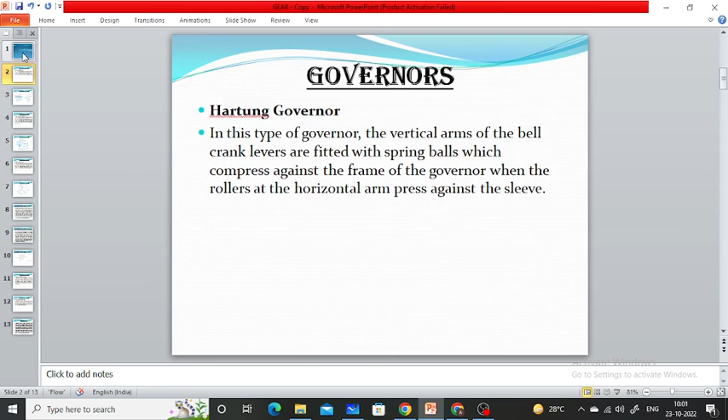नेक्स्ट टाइप का स्प्रिंग कंट्रोल गवर्नर है हमारा हार्टंग गवर्नर। हार्टंग गवर्नर इज ए स्प्रिंग कंट्रोल्ड गवर्नर। In this type of governor, the vertical arms of the bell crank levers are fitted with spring balls which compress against the frame of the governor. When the rollers of the horizontal arm press against the sleeve, in that case, sleeve goes in downward direction.

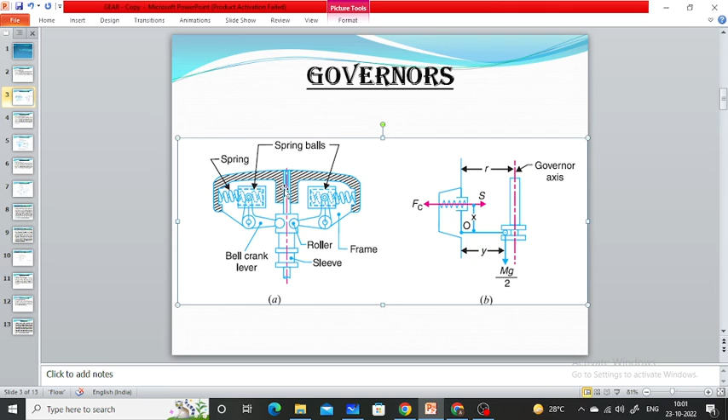इस डायग्राम में आप समझ सकते हैं यहाँ पर हार्टंग गवर्नर का एक लेआउट है। इस गवर्नर में ये सेंटर लाइन जो है ये हो गया आपका स्पिंडल एक्सिस, स्पिंडल। ये स्लीव है आपका और स्लीव में रोलर अटैच्ड है। यहाँ बेल क्रैंक लीवर के वर्टिकल आर्म्स में स्प्रिंग हॉरिजॉन्टली अटैच्ड है और ये फ्रेम के साथ फिटेड है, कंप्रेस्ड फॉर्म में।

जब भी आपका ये गवर्नर का स्पिंडल रोटेट होगा, इस रोटेशन की वजह से बॉल्स बाहर की तरफ मूव करेंगे और जो बेल क्रैंक लीवर का हॉरिजॉन्टल आर्म है वो अपवर्ड डायरेक्शन में स्लीव को एक पॉइंट पर होल्ड करेगा इक्विलिब्रियम कंडीशन में।

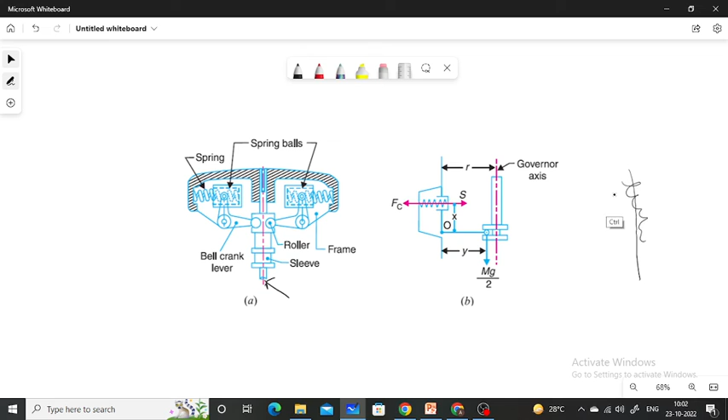ओके, तो हमने देखा था हार्टनेल गवर्नर में जो कंप्रेस स्प्रिंग रहता है, वो फ्रेम से अटैच होके जो बेल क्रैंक लीवर्स होते हैं हमारे, और स्लीव को डायरेक्टली फोर्स करता है। वहाँ पर फ्लाई बॉल्स होते हैं, बट यहाँ पर जो स्प्रिंग्स हैं वो हॉरिजॉन्टल हैं और बेल क्रैंक लीवर को जो फ्रेम है उसके साथ अटैच है, वो स्प्रिंग कंप्रेस कर रहा है उसके वर्टिकल आर्म्स को यहाँ पर। ओके।

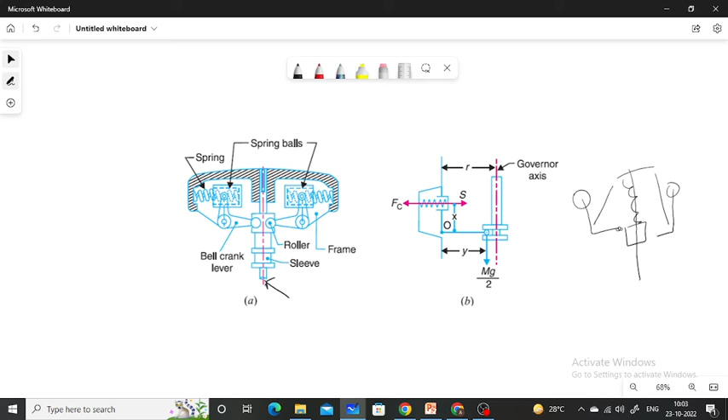नेक्स्ट टाइप का स्प्रिंग कंट्रोल गवर्नर है विल्सन हार्टनेल गवर्नर। A Wilson Hartnell governor is a governor in which the balls are connected by a spring in tension. यहाँ पर आप देख सकते हैं डायग्राम में बेल क्रैंक लीवर एक फ्रेम के साथ पिवटेड है। यहाँ पर वर्टिकल आर्म्स के बॉल्स को सेंटर पॉइंट पर स्प्रिंग के साथ कंट्रोल अटैच कर दिया गया है। ओके।

Balls are connected by a spring in tension. An auxiliary spring is attached to the sleeve mechanism through a lever by means of which the equilibrium speed for a given radius may be adjusted. The main spring may be considered of two equal parts, each belonging to both the balls.

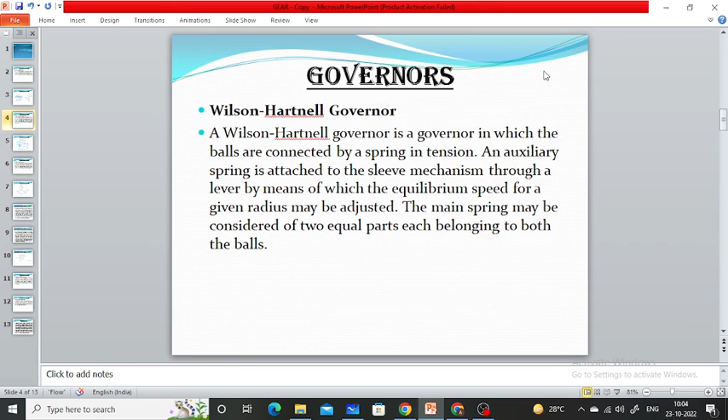तो इस विल्सन हार्टनेल गवर्नर के डायग्राम की हम बात करें, यहाँ पर बेल क्रैंक लीवर में जो फ्लाई बॉल्स हैं उनको स्प्रिंग के थ्रू कनेक्ट किया जाता है और स्पिंडल में स्लीव अटैच है, हॉरिजॉन्टल आर्म स्लीव के साथ अटैच रहते हैं। यहाँ पर एक ऑक्सिलरी स्प्रिंग होती है जो एक लीवर के साथ कनेक्टेड होती है स्लीव के मूवमेंट को होल्ड करने के लिए। जब स्पीड इंक्रीज होती है तो बॉल्स का सेंट्रीफ्यूगल फोर्स इंक्रीज हो जाता है और वर्टिकल आर्म्स आउटसाइड डायरेक्शन में मूव करते हैं, जिसकी वजह से बेल क्रैंक लीवर के हॉरिजॉन्टल आर्म्स अपवर्ड डायरेक्शन में मूव करेंगे और स्लीव का मूवमेंट अपवर्ड डायरेक्शन में होगा।

Whenever the speed of the governor is decreased, in that case the motion of the sleeve will be in downward direction.

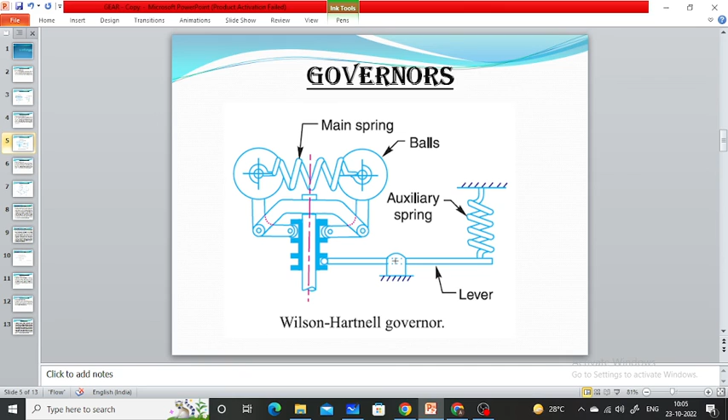Now, the next type of spring control governor is Pickering governor. A Pickering governor is mostly used for driving gramophone. It consists of three straight leaf springs arranged at equal angular intervals around the spindle. Each spring carries a weight at the center. The weight moves outwards and the spring bends as they rotate about the spindle axis with increasing speed.

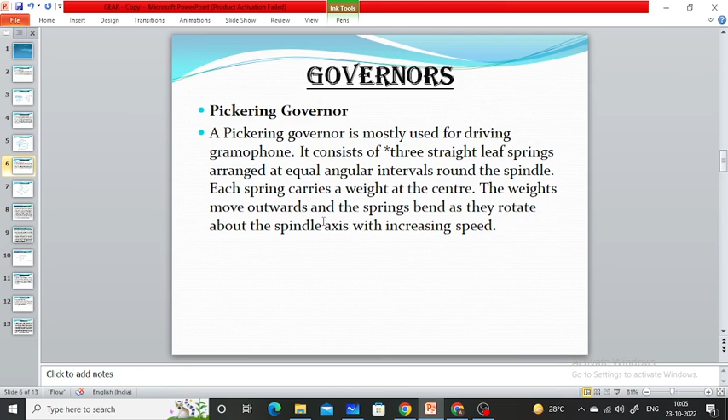तो यहाँ पर पिकरिंग गवर्नर में थ्री आर्म्स होते हैं, थ्री लीफ स्प्रिंग्स होते हैं जिसमें मासेस अटैच होते हैं और स्पिंडल में अटैच होते हैं। जब भी स्पीड इंक्रीज होती है सेंट्रीफ्यूगल फोर्स इंक्रीज होगा और ये लीफ स्प्रिंग्स बैंड हो जाते हैं जिसकी वजह से स्लीव डाउनवर्ड और अपवर्ड डायरेक्शन में मूवमेंट करते हैं।

ओके, तो ये कुछ टाइप के गवर्नर्स थे स्प्रिंग कंट्रोल गवर्नर - हार्टनल गवर्नर, हार्टंग गवर्नर, विल्सन हार्टनल गवर्नर एंड पिकरिंग गवर्नर।

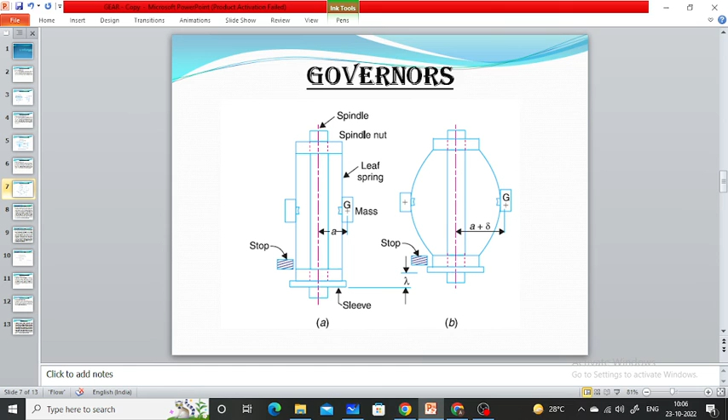Now come to the next topic, sensitiveness of governors. Sensitivity or sensitiveness of the governor. What is the meaning of the sensitivity of a governor?

Consider two governors A and B running at the same speed. When this speed increases or decreases by a certain amount, the lift of the sleeve of governor A is greater than the lift of the sleeve of governor B. It is then said that governor A is more sensitive than governor B.

What is the sensitivity of the governor? Sensitivity of the governor is the measure by which we can say that the output or the movement of the sleeve, by changing the load or the speed of the engine or the governor, is more than the other, or the same as another governor.

In general, the greater the lift of the sleeve corresponding to a given fractional change in speed, the greater is the sensitiveness.

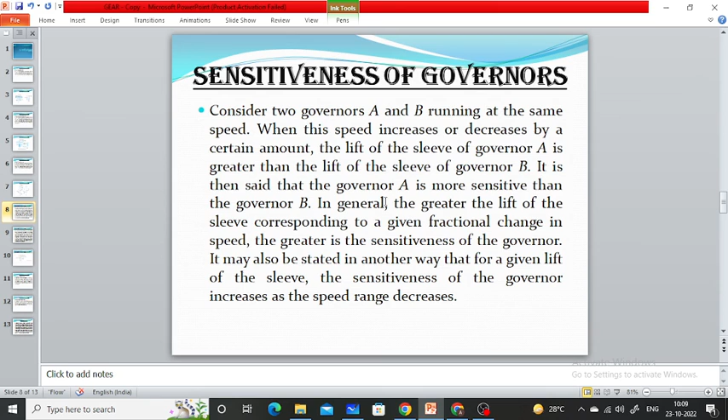It may also be stated in another way that for a given lift of the sleeve, the sensitiveness of the governor increases as the speed range decreases. So sensitiveness of the governor is a measure by which we can say, for a given change in speed, how much movement of the sleeve will occur. In a more sensitive governor, the sleeve moves rapidly, or the displacement of the sleeve is more than the other governors.

This definition of sensitiveness may be quite satisfactory when the governor is considered as an independent mechanism. But when the governor is fitted to an engine, the practical requirement is simply that the change of equilibrium speed from the full load to the no load position of the sleeve should be as small a fraction as possible of the mean equilibrium speed.

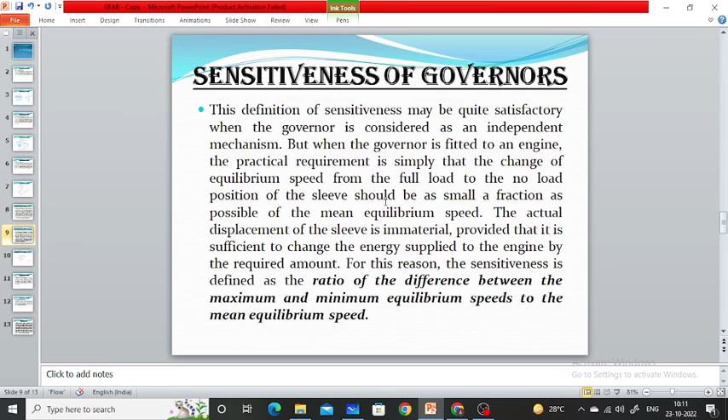For this reason, the sensitiveness is defined as the ratio of the difference between the maximum and minimum equilibrium speed to the mean equilibrium speed.

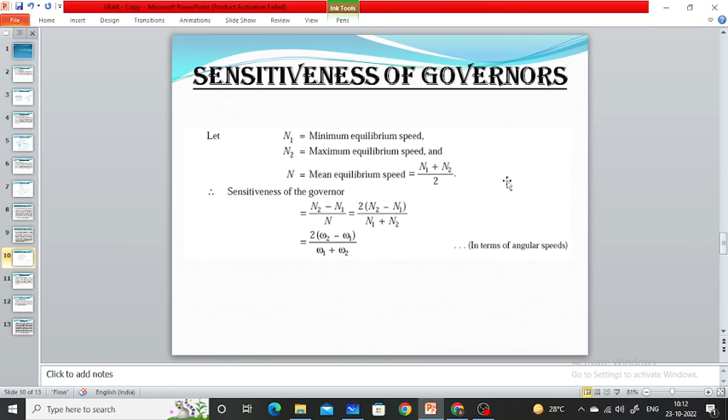According to the definition of sensitiveness of the governor, if N1 is the minimum equilibrium speed and N2 is the maximum equilibrium speed, then the mean equilibrium speed will be equal to N1 plus N2 by 2, and the sensitiveness of the governor will be equal to N2 minus N1 upon N, as per the definition, that the range of speed divided by the mean speed is the sensitiveness of the governor. So sensitiveness will be equal to 2 times bracket N2 minus N1 upon N1 plus N2, or in the case of angular speeds, it is equal to 2 times omega 2 minus omega 1 upon omega 1 plus omega 2. It is desirable that the sensitiveness of the governor is not greater.

Now the second topic is the stability of the governors. What is stability of the governor? A governor is said to be stable when for every speed within the working range there is a definite configuration, that is, there is only one radius of rotation of the governor balls at which the governor is in equilibrium. For a stable governor, if the equilibrium speed increases, the radius of the governor balls must also increase.

So what is the stability of the governor? A governor is said to be stable when for every speed within the working range there is a definite configuration. So a governor is said to be stable when the governor's sleeve attains a fixed position with respect to the speed of the governor. So the governor is known as a stable governor.

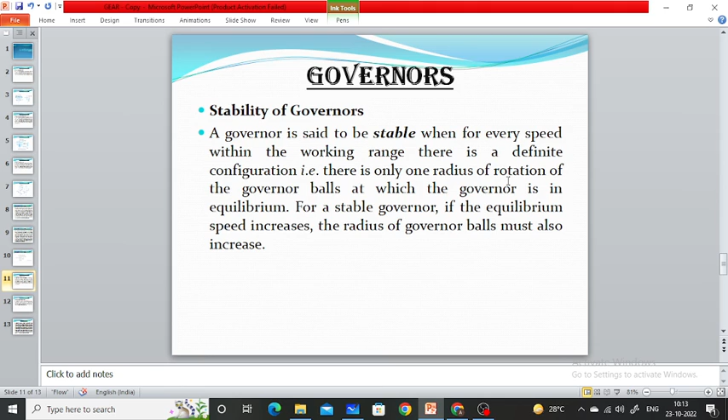Isochronous governors: a governor is said to be isochronous when the equilibrium speed is constant for all radius of rotation of the balls within the working range, neglecting friction. The isochronism is the stage of infinite sensitivity. So a governor is said to be isochronous when the equilibrium speed is constant.

So for the Porter governor, Proell governor, and Watt governor, for the centrifugal type governor, it is impossible to have an isochronous governor, because for a different equilibrium speed the position of the sleeve will be different. So the equilibrium speed cannot be constant for the centrifugal type or deadweight type governors, but in the case of a spring control governor, the equilibrium speed can be fixed due to the variation of the spring force.

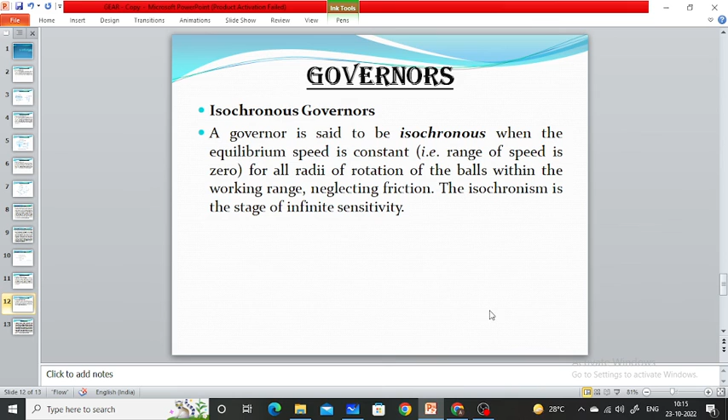So Porter, Proell, and Watt governor can never be isochronous governors. Isochronism can only be seen in the spring control governors, like Hartnell governor, Wilson Hartnell governor, Pickering governor, or Hartung governors.

Now the next topic is hunting. It is a very important topic. Hunting: what is hunting? A governor is said to hunt if the speed of the engine fluctuates continuously above and below the mean speed. This is caused by a too sensitive governor which changes the fuel supply by a large amount when a small change in the speed of rotation takes place.

As I already told you, if the sensitivity of the governor is more, in that case whenever a change in the load occurs, the sleeve of the governor will move more than a less sensitive governor. In that case, the fuel supply will increase suddenly in the engine, due to which the speed of the engine will change rapidly, and due to this rapid change and the more sensitive governor, the sleeve of the governor will move rapidly between above and below the equilibrium speed.

So this phenomenon, the movement of the sleeve below and above the equilibrium speed, is known as hunting. Hunting occurs whenever the governor is more sensitive, or the sensitivity of the governor is more. So to avoid the hunting process in the governors, we use Hartnell governors or spring control governors.

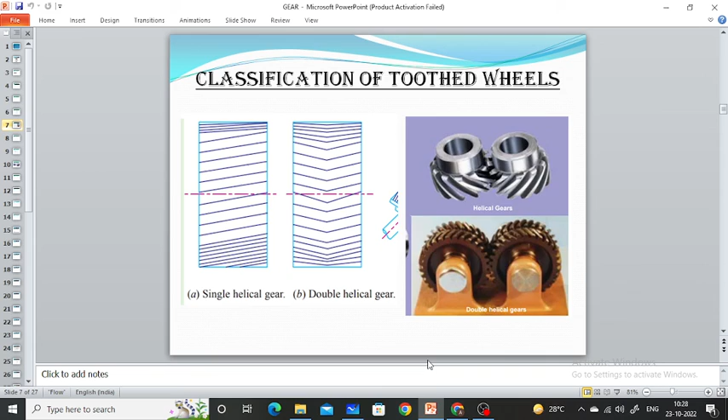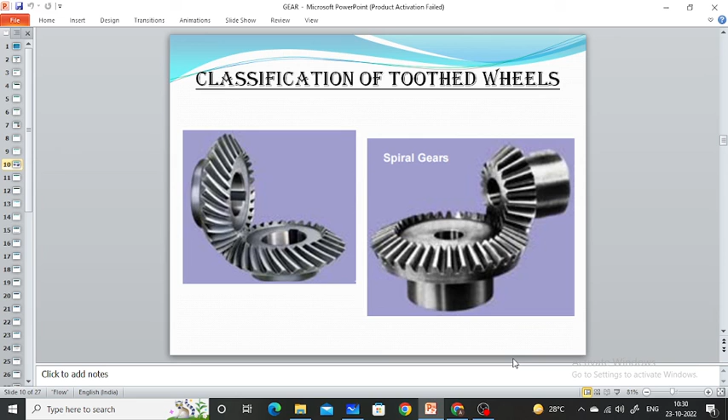The gears, according to the peripheral velocity of the gears, may be classified as low velocity, medium velocity, and high velocity. The gears having velocity less than 3 meters per second are termed as low velocity gears.

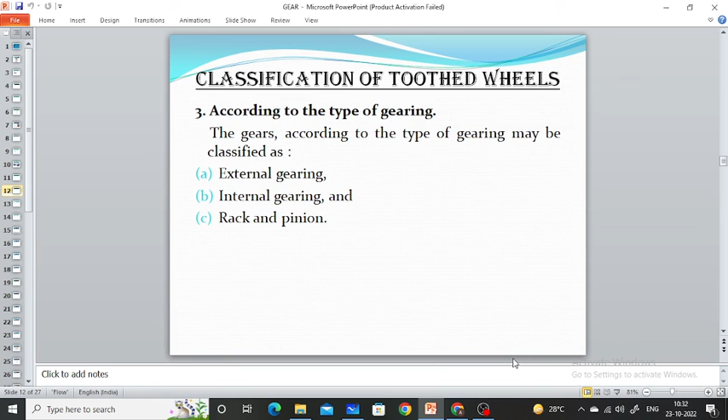Pinion gearing. In the rack and pinion gearing, we have a straight bar having teeth and a pinion which has teeth on a disc, in a circular position. Teeth are cut in a circular position, but in the case of a rack, teeth are cut straight.

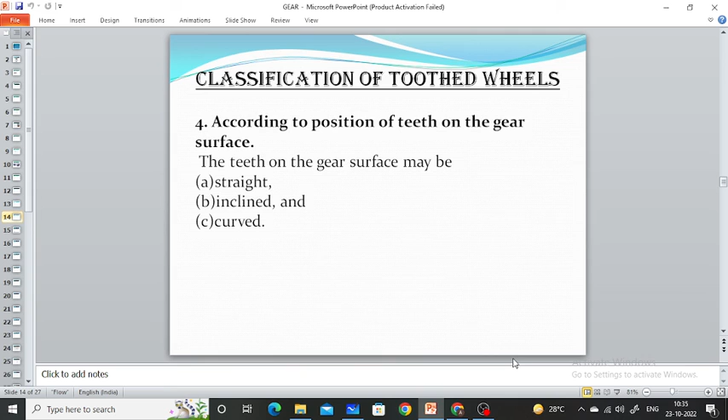Some terms used in gears.

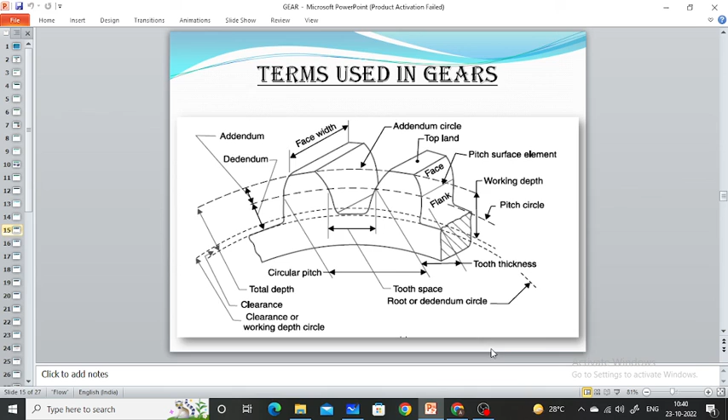So, terms used in gears. First is pitch circle. What is pitch circle? It is an imaginary circle.

Now, pitch point. It is the common point of contact between two pitch circles, known as pitch point. Pitch surface: it is the surface of the rolling discs when the meshing gears have replaced at pitch circle. So pitch circle diameter, pitch point, and pitch surface.

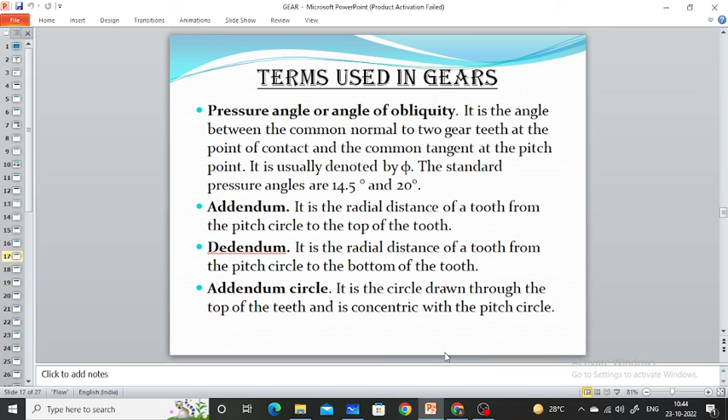Addendum circle. Now, dedendum circle. It is a circle drawn through the bottom of the teeth and concentric with the pitch circle, known as dedendum circle. It is also called root circle.

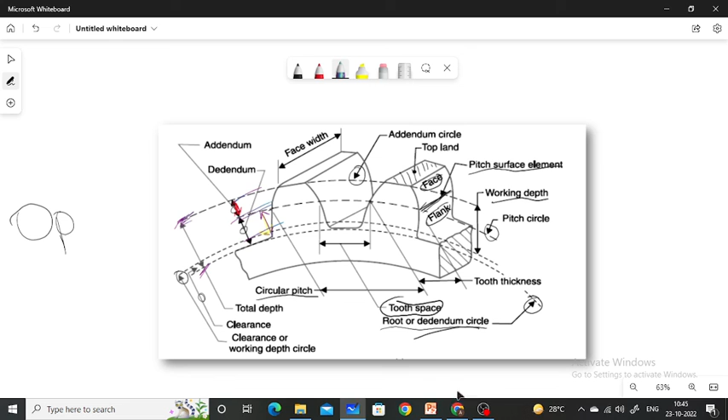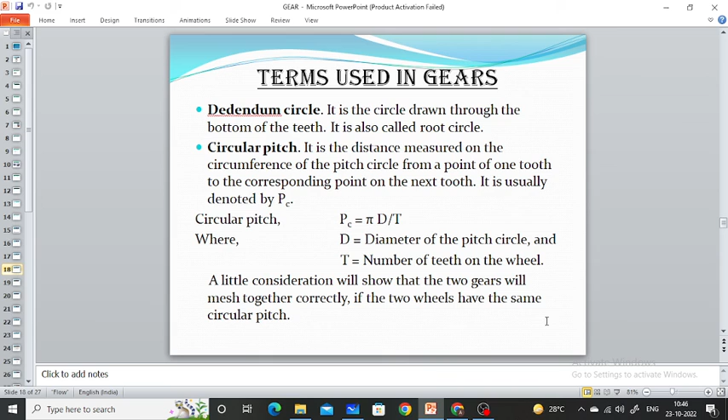Diameter of the pitch circle, and T is the number of teeth on the wheel. A little consideration will show that the two gears will mesh together correctly if the two wheels have the same circular pitch. If the circular pitch is not equal, in that case the gears will not mesh.

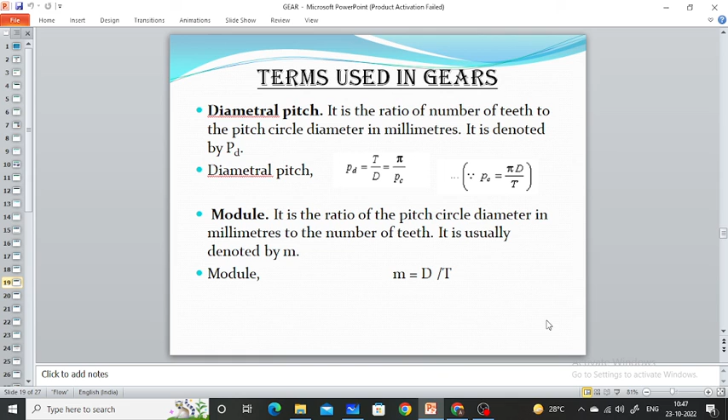The ratio of pitch circle diameter to the number of teeth is known as module. It is usually denoted by small m, and according to the definition of module, module is equal to the diameter of pitch circle divided by number of teeth. This is the module.

Working depth: it is the radial distance from the addendum circle to the clearance circle, known as working depth. It is equal to the sum of the addendum of the two meshing gears. Tooth thickness: it is the width of the tooth measured along the pitch circle, known as tooth thickness.

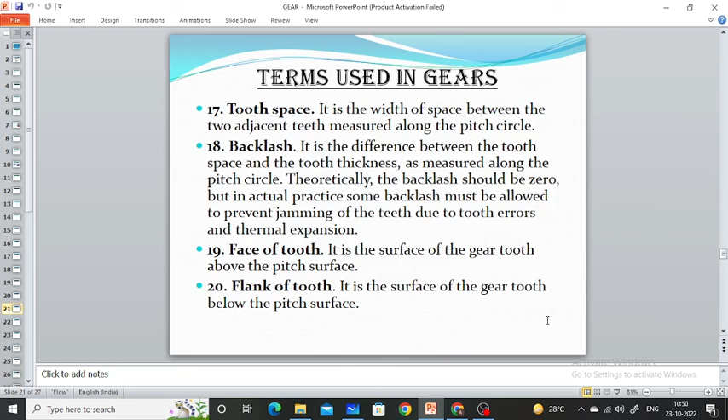Top land: it is the surface of the top of the tooth, known as top land. Face width: it is the width of the gear tooth measured parallel to its axis. Profile: it is a curve formed by the face and flank of the tooth, known as profile. Fillet radius: it is the radius that connects the root circle to the profile of the tooth.